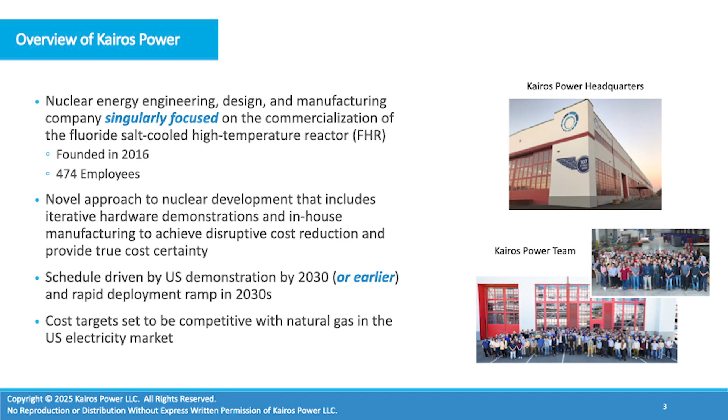Really quickly about the technology—we're not going to go too deep into all the different technologies related to our reactor technology, but we do leverage two basic fundamental parts of our safety case: the high temperature coated particle fuel, which if you're familiar with advanced reactors is fuel that's been utilized dominantly in gas reactor demonstrations, and we utilize a coolant called FLiBe. These are really the basis of our technology.

So in terms of what Kairos is actually doing, right now what we're really focused on is trying to deploy a technology that is really cost competitive.

If you start on the right-hand side of this plot, really starting with cost certainty and going from the left—utilities that are looking to make decisions today about new nuclear really are looking for cost certainty. In their planning process, they really want to know: if they deploy a new technology, can it be delivered on cost and on schedule?

We believe very strongly that to really reach that cost certainty, it's really the product of four things. Technology certainty—will it work? It has to obviously work, it has to function as designed. Licensing certainty—it's a very heavily regulated technology, so you have to convince your regulator that you've got the right approach and the right design. So there's a lot of licensing risk for new nuclear technologies.

Supply chain and manufacturing—this is a new technology, so do you have a supply chain? Do you have the capacity to really build the pieces and parts that go into your reactor technology? And last, but certainly not least, construction risk, build certainty—that's a really important piece of really deploying these technologies on cost and on schedule.

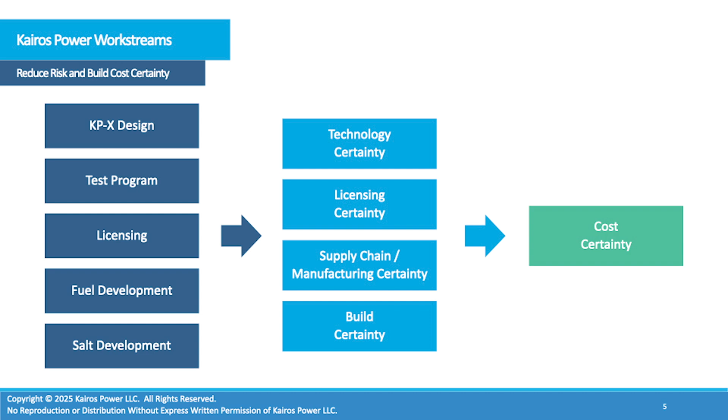So in practice, everything we're doing right now really feeds into these four buckets. All of our dominant work streams right now really drive, and all the iterations I'm going to talk about today in terms of our demonstrations, really go into these four buckets: technology certainty, licensing certainty, supply chain certainty, and build certainty. We believe if you're not working on all four of these while developing a new reactor technology, you're most likely going to have challenges on the back end.

So I mentioned iterative development. I'm going to talk a little bit about how we do this in practice.

This is a slide we actually stole a little bit from SpaceX, and we adapted it for the nuclear world. If you look at a conventional development cycle—plan, design, build, and test—and you're familiar with the big plants built in the Southeast, the AP1000 projects in Georgia, design activities on those started in the early 1990s. If you look at the time it took to actually get that reactor technology deployed, up and commissioned and operating, you're talking about a 30-year development cycle. That's a very long development cycle, from 1990 effectively all the way out to 2024.

So really trying to drive those development cycles down is a big part of what Kairos is trying to do. On the top it shows that conventional cycle, and what we've seen without really building and testing is this inner loop where you see a lot of paper designs, a lot of innovation on paper, but what you're not seeing is designs actually going to building and testing. If you have a 30-year development cycle, you're waiting 30 years to get that feedback into your design for the next iteration. This creates a lot of challenges that I don't need to spend time on here, but that's the paradigm we're trying to break right now.

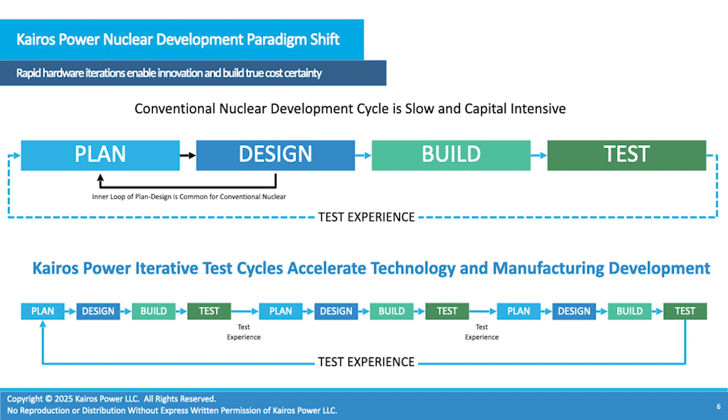We do that in a non-intuitive way, through a series of smaller iterations. I'll talk a little bit about how we do that, but the important piece is we get feedback into our design earlier than we would through these larger development cycles.

So how does that happen in practice? At Kairos we focus a lot on non-nuclear development, which allows us to move quite quickly. We have a series of what we call engineering test units—engineering test unit 1, 2, and 3. Engineering test unit 1 and 2 are located here in Albuquerque, and engineering test unit 3.0 is actually in Tennessee. We also have two demonstration reactors we're working on right now, Hermes 1 and Hermes 2. A lot of my talk today will be giving updates on these engineering test units and what we're doing in Tennessee on the reactor side.

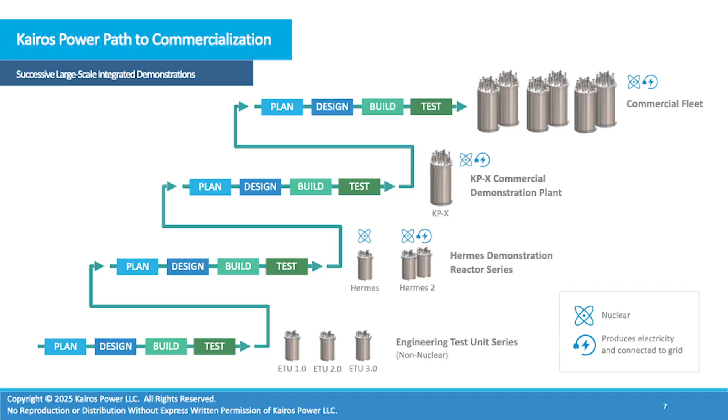Just a little bit about the company and our locations. We have a presence across the United States. We're headquartered in Alameda, California. We opened our manufacturing development campus in Albuquerque in about 2019. It was a very dynamic time—unfortunately the pandemic hit right when we announced we were going to buy the property, and that created challenges in terms of early staffing. We had plans to bring people out to California for a lot of knowledge transfer, and the inability to travel during the pandemic created a lot of issues.

We're developing a facility at Los Alamos National Lab to produce fuel for the Hermes 1 reactor, called the low-enriched fuel fabrication facility. We have an analogous facility here where we're doing fuel development, but not at the scale we'd want in Los Alamos. We have a site in Oak Ridge, Tennessee, where we're building the Hermes 1 and Hermes 2 plant, and we've already started construction on Hermes 1. We have a small licensing office in Charlotte, an instrumentation lab in upstate New York, and a facility at a partner called Materion, where we produce our coolant FLIBE at scale. That's an important location for us.

So I mentioned vertical integration. Really, the vertical integration we've been focusing on includes some of our major work streams—fuel and salt are really important to Kairos. That's very important to our safety case and to making our reactor work. So we've made commitments to bring in salt production as well as fuel production. These are just examples—I mentioned the site we have in Elmore, Ohio, where we're able to produce metric ton quantities of FLIBE that we need for our reactor demonstrations.

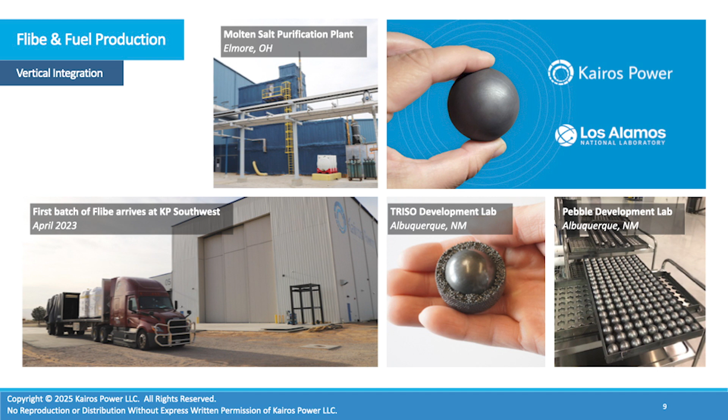In addition, we have a lot of work around fuel, in partnership with Los Alamos. We have a pebble development lab where we produce pebbles, and we're standing up a TRISO development lab where we have a state license and work with natural uranium and depleted uranium. This enables us to iterate very quickly and bring design concepts into the fuel form itself.

In terms of manufacturing, a lot of what Kairos does, about a quarter of the company is actually in manufacturing, so we have a very big manufacturing presence. We hold an ASME stamp for Section 8, so we're able to do vessel production. We set up a lot of this capability with a lot of local hires. It's been a great process in terms of standing up the manufacturing.

In terms of manufacturing capabilities, we've stood up a lot of both milling and machining capabilities, milling and turning capabilities at our site, shown in the upper right picture. We have a pretty substantial welding team. We brought in vessel manufacturing, an area we've been focusing a lot of attention on. We will be producing our own reactor vessels as well as vessels that support the overall technology.

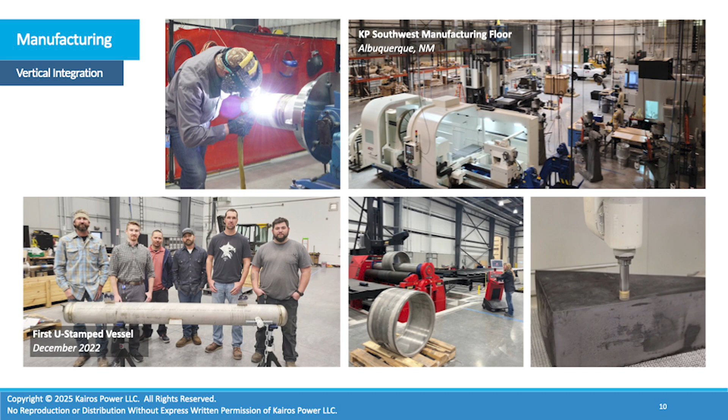And in the lower right, we have graphite in our reactor as a moderator. It's a very important part of the design. The graphite machining is a capability we've also invested in and are standing up. So there's a lot of manufacturing activities happening down in Mesa del Sol. It's effectively where we do our large-scale manufacturing, and where we do a lot of our large-scale testing.

To talk a little bit about a commercial agreement that was announced: we have an agreement with Google that was signed recently, you may have seen the news around that. There's been a big push from the hyperscalers and a lot of interest in AI power demand challenges, so we have a partnership we're very excited about with Google. We've signed a master plant development agreement that creates the right framework for us to set up power purchase agreements with utilities and regions that Google is trying to service. That's a process we're going through now.

And we do plan to have some news that will be coming out in the public domain relatively soon. But this is an agreement that allows us to work through the commercial case on the back end, which is really important to us.

Here's some additional information around the vertical integration part. These are some of the pieces and parts that we are focused on. On the left-hand side, you can see some of the nice manufacturing activities. I'll talk a little bit later about the vessel manufacturing. This is rolling plate here, pieces and parts that go into key parts of our reactor system. So just a lot of manufacturing and a lot of focus on effectively building and demonstrating the technology.

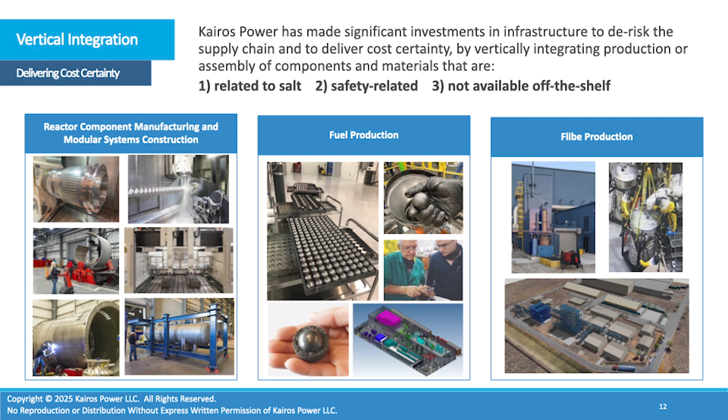These are pictures of the fuel production line and some of the pebbles that went into our first engineering test unit. And then the salt production facility - this is a facility we just broke ground on in Mesa del Sol. You can see it here a little bit, but we just started construction on it. This is the place where we're going to produce the enriched FLIBE that we need for our reactor in Tennessee. This is a big project we have ongoing, and it's really setting up the capabilities for us to produce FLIBE at scale.

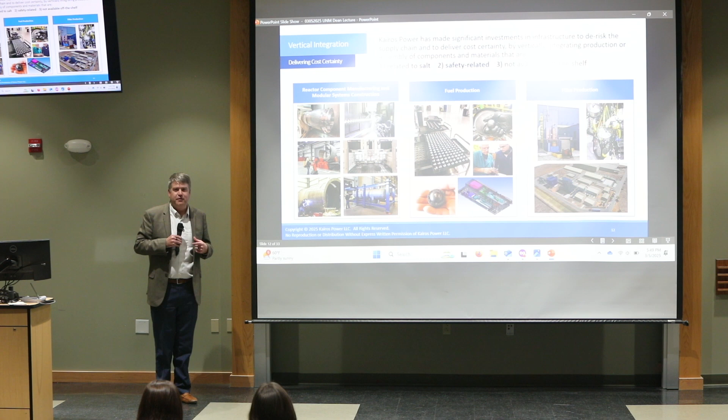An important thing to take away is that even though the Hermes 1 reactor is in Tennessee, many of the pieces and parts that make up the primary system actually come from here in Albuquerque and are fabricated here. So a lot of the manufacturing activities are actually supporting that deployment in Tennessee.

So I'm going to talk a little bit about these major iterations - what is Kairos actually doing? We're trying to demonstrate our technology through these iterations. The first one we built, this facility was run. We've actually decommissioned it and it's been moved out of the current location, so it's no longer with us, but I'm going to talk a little bit about it because we got a lot of lessons learned from it. Why did we do this demonstration? I mentioned we do non-nuclear testing.

This is not a facility that's regulated by the NRC. It's a facility regulated by OSHA and EPA and obviously local permitting authorities, but it's not regulated by the NRC. It doesn't have nuclear material in it. It's effectively mock-up material, but it performs mechanically very similar to the reactor system.

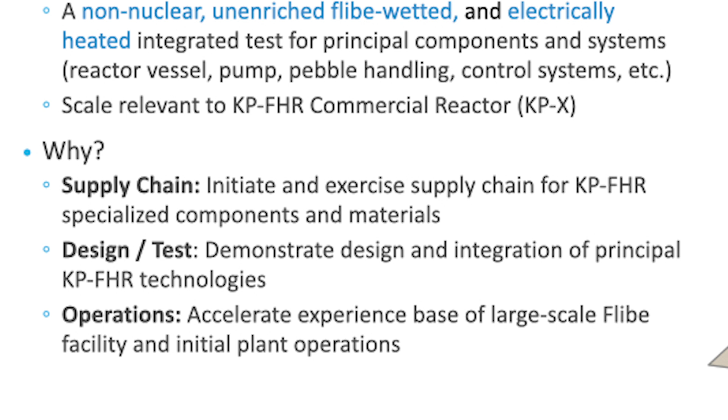The three areas that we were focusing on was really to evaluate our supply chain. If we didn't have a supply chain that can make a mock-up of what we were trying to do, then we knew they couldn't deliver for the reactor system. So evaluating the supply chain was really important to us. It also enabled us to build an organization that was able to do the design, test, iterations in-house in a very efficient way. So that was also a very important objective for the ETU-1.

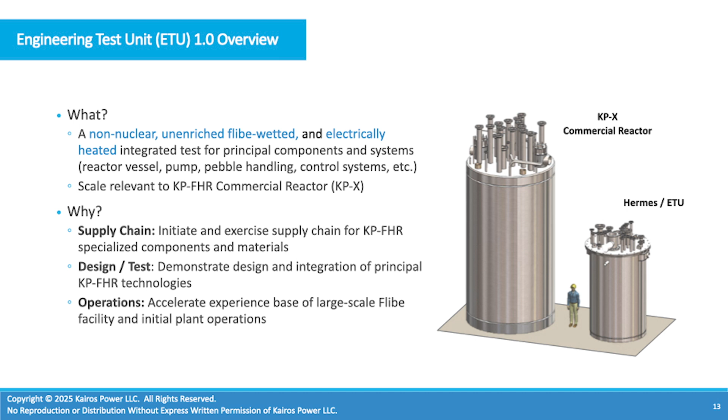And last but not least, once you actually build the facility, running a 24/7 facility like this and getting the operations back into the design, again, very, very critical for Kairos. So if you remember my earlier slide where we talked about technology certainty, licensing certainty, supply chain certainty, and construction certainty, these are examples of how this kind of feeds into our development.

So the engineering test unit 1, got some pictures here. I'm going to walk through some pictures of the actual build. As I mentioned, we took the property over right at the beginning of the pandemic, so a lot of this work was happening during that time period. This is all in Mesa del Sol. This is when we acquired the shop manufacturing building down in Mesa del Sol.

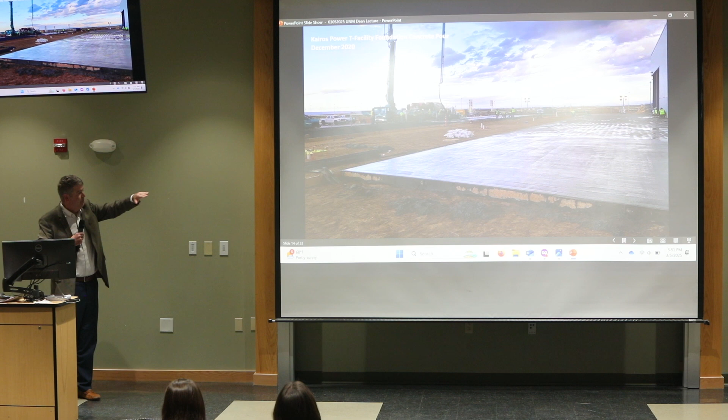The first thing we did was we actually added an annex. It's a beautiful building, but it's actually got a very low high bay in terms of the roof height, so it creates some challenges for doing larger scale tests like what we're building. So I'm going to walk through some pictures that show the engineering test unit 1 in Albuquerque and just kind of show the sequencing of the build.

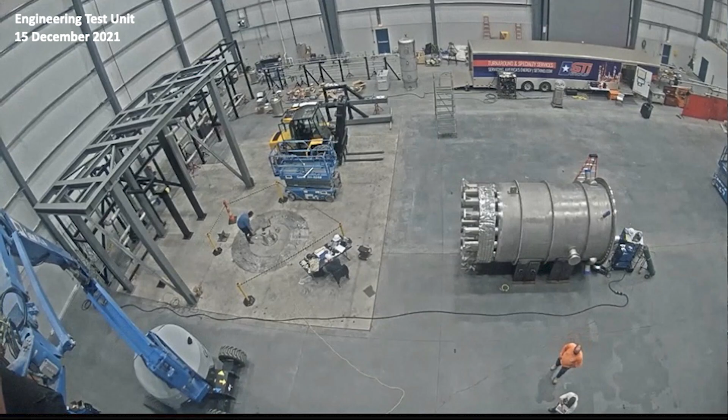So this is what we call our ETU annex. It's now where we do vessel manufacturing. It's a 40,000 square foot pre-engineered metal building. It's what housed our engineering test unit 1.

This is a picture of the vessel that arrived. I mentioned we brought in vessel manufacturing. This vessel was not produced in-house, it was actually an external vessel. When it arrived, we had some tolerance issues with it, and so we actually had to do a fair amount of machining of the graphite that had to go into the vessel. It was actually a result of this experience that we made the decision to bring vessel manufacturing in-house.

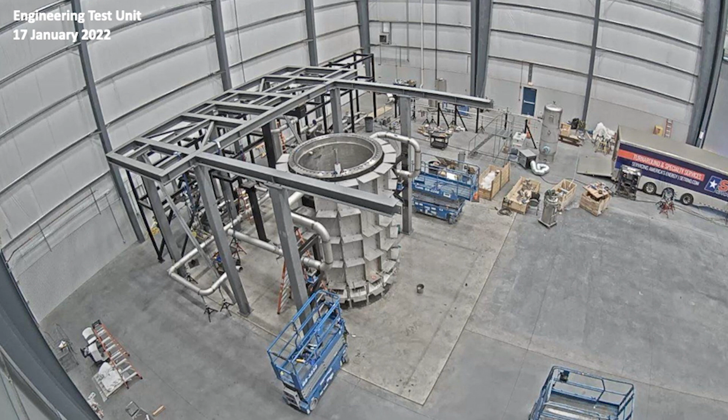So this is a picture of the vessel about to be lowered and placed into its location in the enclosure. This is showing the heaters coming up around it and the interconnecting piping, the large bore piping where the FLIBE flows through, and a lot of the support infrastructure around the vessel.

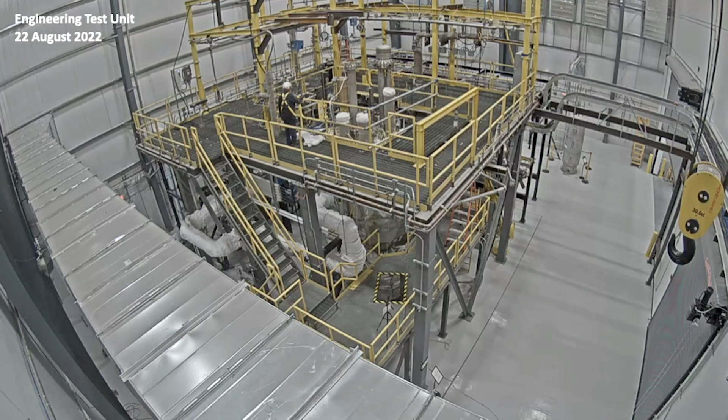Moving forward to August of 2022, you can see more of the upper head equipment has been installed. In the upper region, you've got insulation going up around all of the piping and the vessel, and you can see more of the facility coming together. And this is the final picture of it prior to operations, actually post-operations.

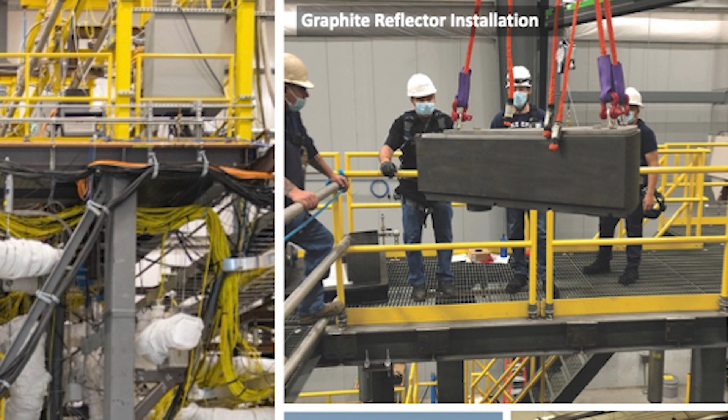We self-perform a fair amount of the work that we do. Certainly for assembly of the engineering test unit, in the upper right hand you can see some of our team members actually installing the graphite blocks in the reflector structure within the actual vessel itself. In the lower right, you can see FLIBE actually arriving. Again, it's about 12 metric tons that we loaded into the engineering test unit 1, which is a pretty substantial amount of material. We have 2 control rooms.

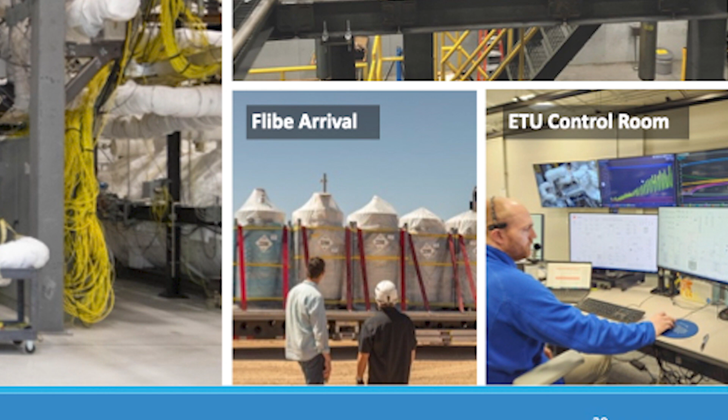We have one in Albuquerque and we have one in California, so we're able to do remote monitoring from California as well. This was a big change for Kairos. We're not a 24/7 operations company, but when we started up ETU, it became very clear we would have to run this facility 24/7, and we had to do it over several holidays. This was a big shift for the company, but it actually created a lot of opportunities to build up the operational program that we're going to need for our reactors.

So what are some of the lessons learned?

I mentioned really from the ETU1, we had some tolerance issues with the vessel as it arrived, so that was a major lesson. If you look at reactor installations, the vessel is a very central part of the construction process, so not having your vessel early is a challenge. It's also one of the last components you want to design, so there's a lot of tension between trying to get the design complete and having the vessel arrive.

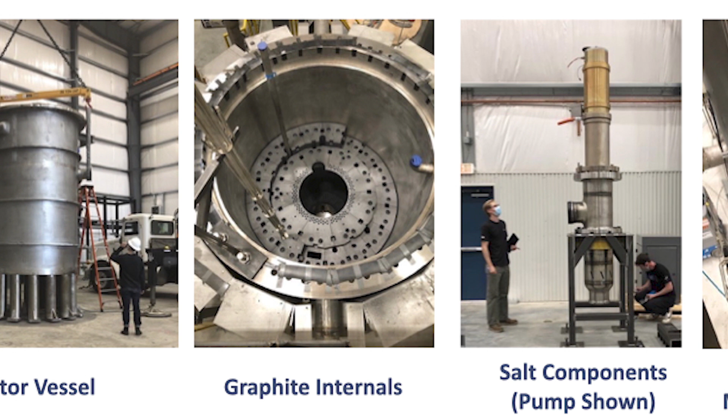Because of the out-of-tolerancing issues that we had with the vessel, we actually had to remachine all of the graphite blocks. There's about 308 graphite blocks that make up the reactor internals here. We had to go back and remachine all of those, which was a big deal for us, but because we had that capability in-house, we were able to do that relatively efficiently.

A lot of positive experience about the pump. This pump was actually a pump that we worked with a company called Barber-Nichols to develop. We brought a lot of that technology and capability in-house, so the pump that we're building for the ETU2 is all built within Kairos proper.

And then last but not least, we learned a lot about the value of modular build. We were not able to do that for the engineering test unit 1. We were forced to do some modular builds just due to the schedule and how it played out, but it really pushed us in a direction for engineering test unit 2 to really incorporate modular construction into the process.

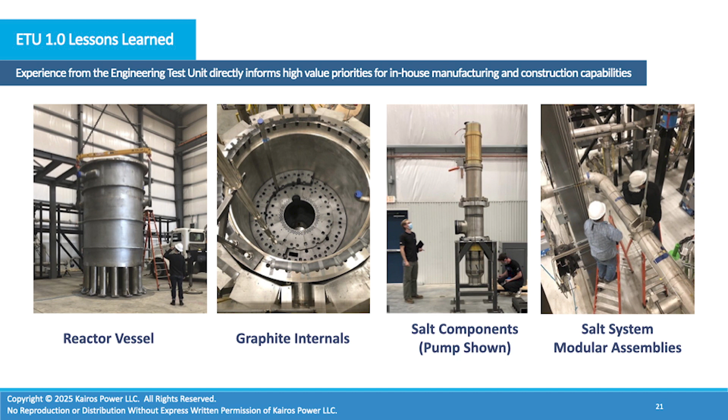One of the major lessons I would say is getting a complete design and getting a facility like this through the finish line actually takes a lot of work. There were many times that we were at 90%, and we were at 90% for a long time. The reality is getting the design complete has a lot of major challenges.

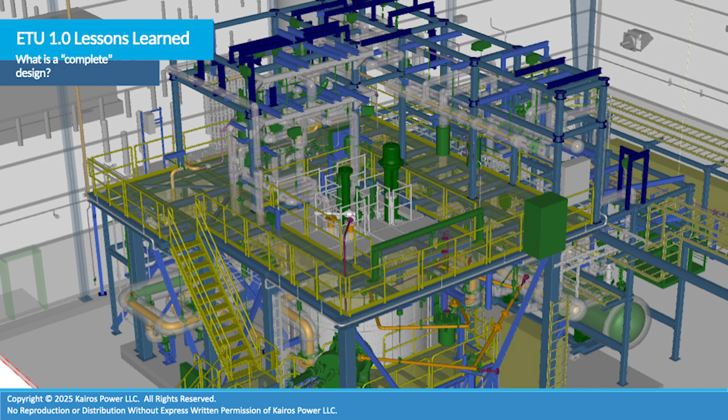When you look at nuclear construction today, one of the things they will always say is you need to have the design complete prior to starting construction. In practice, getting to a complete design has a lot of challenges. This was a very important process for Kairos to get to that final finish line on the design, but that was a very valuable lesson for us in terms of not being too optimistic about schedule and ensuring that you have the ability to deliver.

This is just a little bit of information about ETU1 in terms of the numbers. It's a high temperature system, so it operates normally around 600 degrees Celsius. These are just some of the capabilities that were demonstrated. We like to say it's the world's largest FLIBE system ever built.

The other large FLIBE system we can look to is really the molten salt reactor experiment that was built in Oak Ridge, which had about 4.5 metric tons. So this is at a pretty substantial scale in terms of the new application and the new environment, in terms of the actual tonnage of the salt.

We have a system where we insert pebble fuel, so it's online refueling. The ability to demonstrate that capability was really important for us, so we were able to go through that process of loading fuel in and removing fuel. We were also able to push the pump to very high flow rates, so get confidence in how the pump behaves.

We do have a mock reactivity control system. It's actually all the same equipment that you would use in an actual reactor, but of course we're not controlling reactivity. We're able to see the mechanical insertion, how it performs and how it behaves. We had about 25,000 strokes of that system.

And then also chemistry control for us is really, really important. The ability to actually demonstrate chemistry control and show the ability to take samples and to monitor, those are all really important steps for us. And it's very difficult to do that for a first-of-a-kind reactor system. If you can do that in a non-nuclear environment, you can demonstrate a lot of those capabilities.

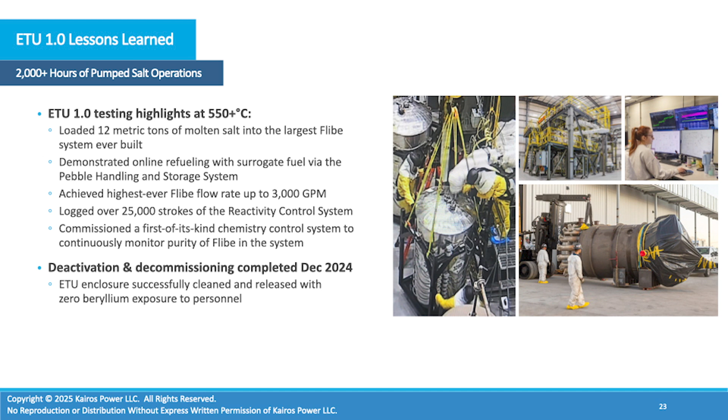Last but not least, we had to go through the full life cycle of actually decommissioning the facility and removing it and cleaning it in a very responsible way. You can see on the lower right, that's actually a picture of the vessel leaving the facility. That's really important to us. We're going to be building a reactor that we're responsible for the D&D of that facility.

Getting lessons into how to look into decommissioning these facilities, even though this isn't a rad environment, it's a beryllium-bearing salt, it's still a very highly toxic environment. And getting those lessons have been very important for us in terms of driving costs down for the Hermes 1 reactor design.

So I'm going to talk a little bit about a new test that we're building right now, which is called the Engineering Test Unit 2. This is an activity that we're doing right now, again in Mesa del Sol.

Why are we doing it? Well, there are about 4 reasons listed here. We have very strict cost targets that we're developing this Engineering Test Unit 2 under, related to the 80% of the cost coming from commercial off-the-shelf items and raw materials. So that really forces our team to leverage our manufacturing capacity, and that's been very critical for us, better leveraging our manufacturing capability.

Demonstrate some more features of the actual Hermes 1 reactor system, so how we can actually start up the reactor. That was very critical for us. In particular, we were looking at capabilities around upper head maintenance and things of that nature.

One of the big features for the ETU2 that we've been adopting is really this modular design concept. A lot of the Engineering Test Unit 2 is actually being built in a facility next to the enclosure that I showed you earlier, and that equipment's going to be brought in as it's being readied.

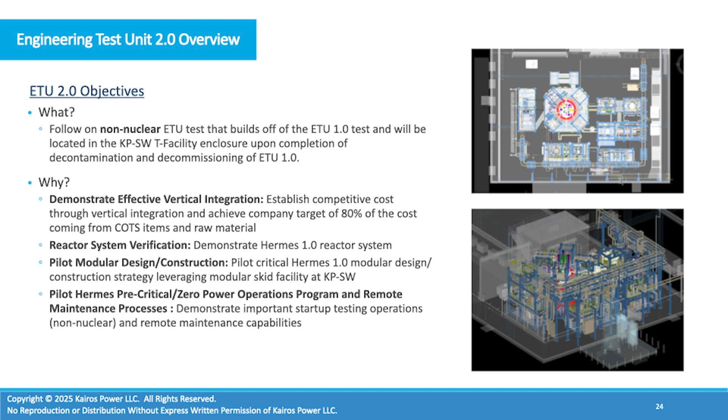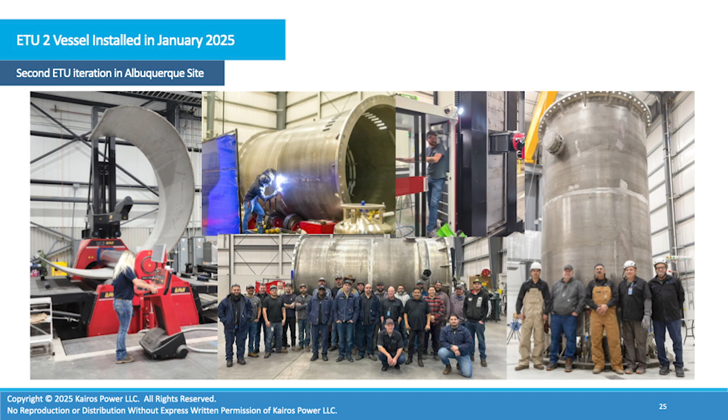So where are we with the Engineering Test Unit 2? Very pleased. We got our vessel installed earlier this year in January. This is a picture of the team. This was a vessel that we did entirely in-house. We have a milestone for our DOE program that we had to install this vessel. We hit the milestone of January, so that was really important to us. This is just a picture of the team very proudly showing the vessel prior to insertion.

Plate comes in, it effectively gets rolled. There's a whole process around machining and welding the vessel together. And then the installation is shown here on the right-hand side with a very proud team that finally got the vessel installed. So we're building out this facility as we speak.

This is an approach that we're going to utilize for Hermes as well. We'll be able to send similar equipment to Tennessee, from New Mexico, to be installed into those reactors in Tennessee. So really the lessons from ETU2 are going to inform the construction of ETU3 and what we're doing in Oak Ridge, Tennessee.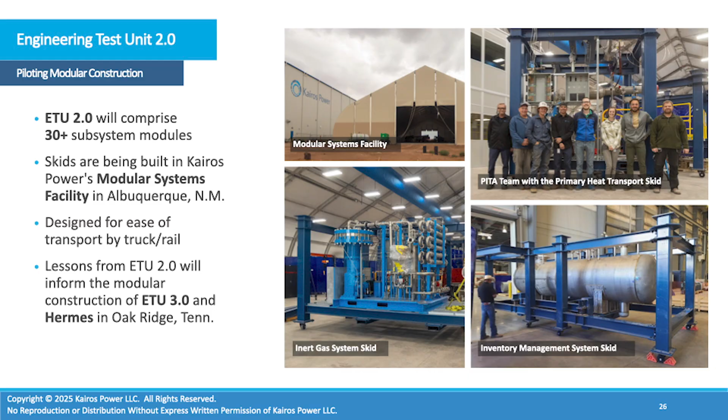So this is just a quick picture of what we're doing here in Tennessee. There's not much to show, at least right now, because we're still in early construction. The Engineering Test Unit 3 is effectively a construction mock-up area for us. It's an area where we can actually learn a lot about the construction needed for nuclear construction. We can bring those lessons from commercial construction and bring them forward in the nuclear environment.

I'll give you an example of that. We have 73 drill piers that make up the foundation of our ETU3 building. A little schematic of it shown over here. It's actually bigger than our Hermes 1 reactor building, so it's a pretty substantial structure.

The drill piers and the contractors that we're using for this work are the same technology and the same contractors that we're going to be using for Hermes, and the nuclear safety related construction. So this has given us effectively 73 drilled piers, 73 lessons in terms of how, when we go into the nuclear construction for Hermes, we can bring those lessons learned into that environment. That's really important for us. Having effective quality control is absolutely essential for nuclear construction, and getting those lessons from commercial construction, then bringing them into the nuclear environment early has been a really big win for us.

We're going to be building effectively a lot of the upper head components that go into the reactor in this building over here, which is where the ETU-3 is going to be located. We plan to install that vessel in May, so that's what the team is working closely on. We're now fabricating that vessel, but we'll have some announcements about what we're doing in Engineering Test Unit 3 pretty shortly. This is a capability we've gotten started on in Tennessee, and it's really the precursor to the Hermes 1 construction.

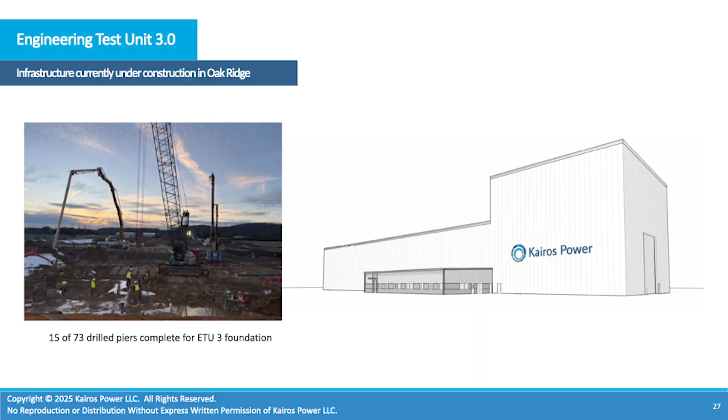So I'm going to talk a little bit about the Hermes reactor itself. This is a nice artistic rendering of it. As I mentioned, we're starting with the commercial construction for our ETU-3 on the drilled piers, but we've done excavation for the Hermes 1 site. So we've completed excavation, and that's been a pretty substantial challenge.

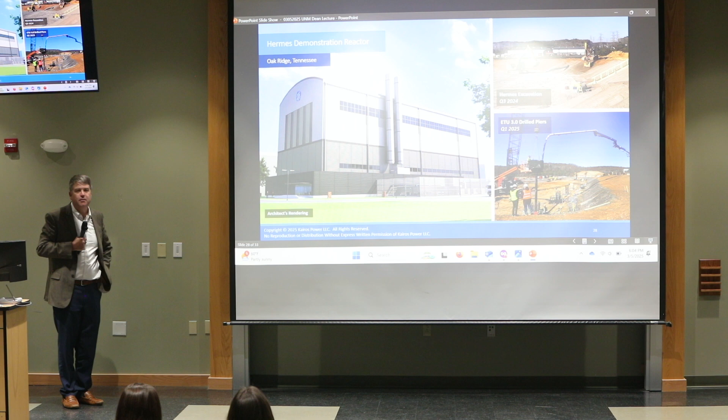The site we have in Tennessee is a beautiful site, but it's also the site where the K-31 and K-33 enrichment facilities were originally located. DOE spent a lot of money cleaning up the site and preparing it for companies like Kairos and others to leverage it appropriately. One challenge is that a fair amount of that K-33 enrichment facility had footers and duct banks located underground, and when DOE removed the original building, the subsurface components were still in place. So when we did the excavation, we had a lot of work managing and removing that material responsibly.

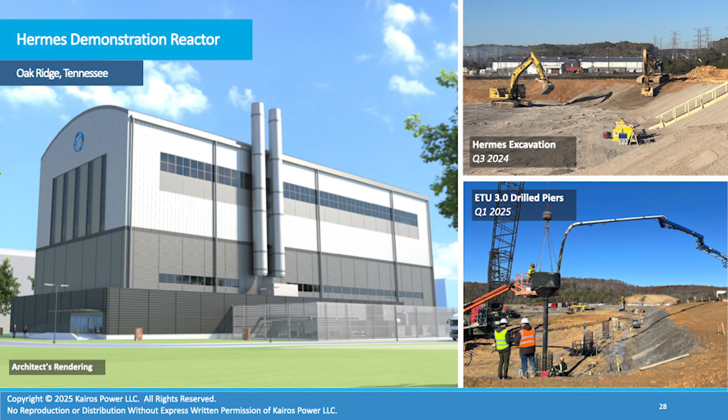But we got through that, and we'll be starting drill pier construction here for Hermes 1 in about 6 weeks.

Licensing is a very important part of what we do, and licensing certainty is absolutely critical. This is just a quick schematic showing how Kairos has approached licensing. We've had a lot of early engagement with the NRC through what we call pre-application and issuing topical reports. You can think of these as, if you're writing a dissertation with 5 chapters, getting your professor to look at each chapter before you submit the whole thing. It's a similar concept, where they're able to look at those topical report sections and issue what are called safety evaluation reports.

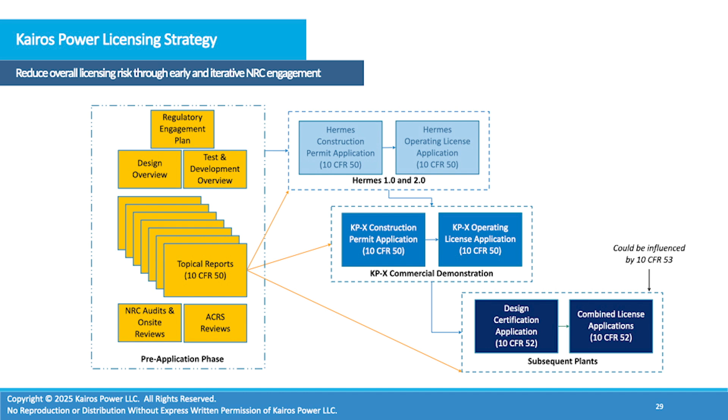That allows us, when we submit our construction permit, to have a lot of that licensing risk de-risked and get those insights into the licensing package. So that's been a big part of what we've been doing. This just shows some of that engagement, and it's been going very well to date.

In terms of what we've accomplished on the licensing side, we have construction permits for both the Hermes 1 reactor and the Hermes 2 reactor, which will enable us to start construction. What Kairos is doing is a bit of a change from the old historic approach, which was always what we call a 2-step process. There was an effort to make it more streamlined, what we call a Part 52 process. That had a lot of challenges in its implementation, with that big project I mentioned in the Southeast in Georgia. So Kairos has adopted that 2-step process.

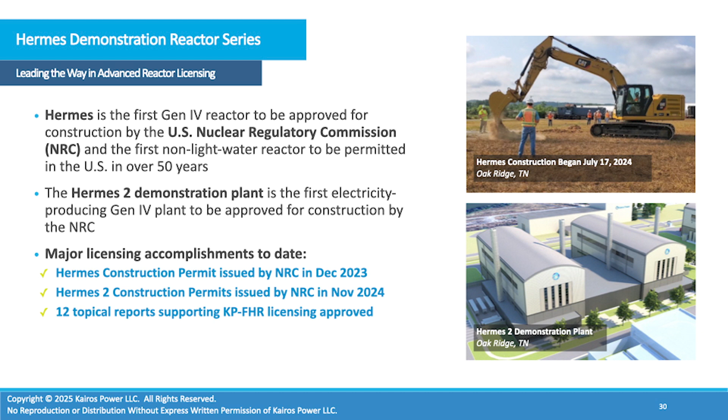A lot of the developers today are going back to that 2-step process. What that basically means is you submit a construction permit, which allows you to start construction, and then you submit an operating license application to run the facility. So there are 2 steps in that process, but it does allow you to start construction, especially early on. This shows some of the highlights here. We've issued 12 topical reports, and we've got those 2 permits. This is a really big part of getting the licensing certainty I was mentioning earlier.

So I'm going to conclude here. I think 35 minutes was roughly where we were going for. Just some key lessons learned and observations. Leaving an academic environment at a great place like UNM and going into a more commercial environment, learning to do things a little differently, there's been a lot of lessons taken away. These are some of the key lessons I've been thinking about and writing down. The right strategy is essential, but the biggest challenges are in the execution. That nice chart I showed you earlier is pretty easy to put together, but in practice, delivering these installations takes a lot of work, and the execution is really critical, very important for Kairos.

I would say the hard things are often easier than people think, and the easy things are often much harder than people think. When we vertically integrated, we heard a lot of people say don't do that. The reality is it is difficult, but a lot of the things that people said were hard were not impossible, and they may not have been as hard as they seemed. On the flip side, things we thought would be easy, hiring, bringing certain folks in, finding the right talent, actually proved to be quite complicated. So I think a level of humility is important.

I think this is probably pretty common for a lot of ventures and new startups. The balance between speed, creativity, and structure process is a constant struggle. It's a challenge, and one of the things Kairos has focused very much on is having an organization that's quite agile. That can be very difficult when you start to get a company of the size of 450, so that can create a lot of challenges.

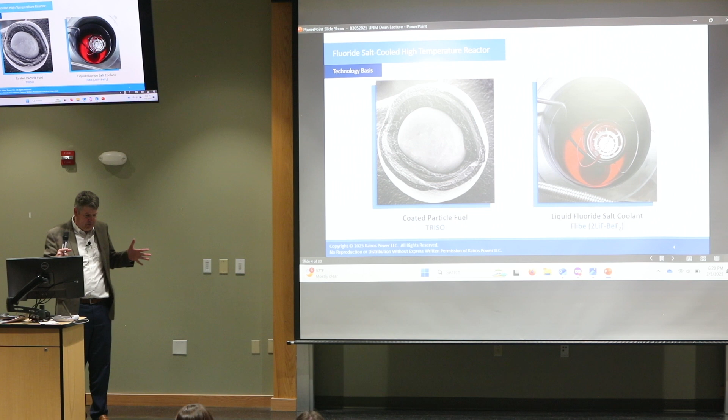When we get our TDL facility up and running, we'll be able to inform that more, but that is an important part. As the schedule gets compressed, we do have to find ways to deliver the fuel faster—that's where these capabilities are really important for us.

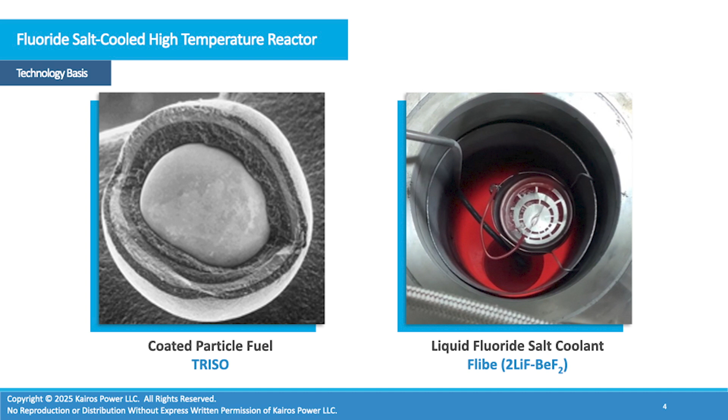So for the engineering test unit 1, we had about 35,000 of these pebbles, all hand pressed by our technicians. And we actually developed automatic pressing capabilities to accelerate that process. That's really important to us because we have a pretty small facility at Los Alamos that we'll be putting our equipment into, so to get more production and capability out of it is really important for us.

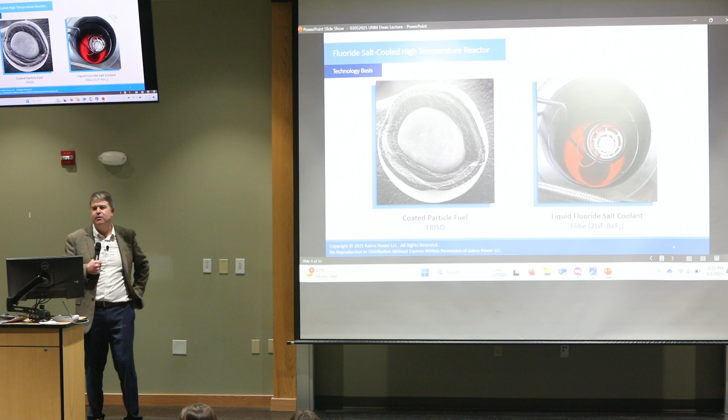Maybe just coming back again to the start of the company, to which extent did IP come out of the university system into the small startup?

Kairos' position on IP is a little bit unique in the sense that we believe our technology is relatively novel enough, and we're moving fast enough, that spending a lot of time filing hard IP and patents has not been a focus for us. So we don't have a very large IP portfolio. It takes a lot of effort to file those patents, and then your engineers are filing patents instead of doing development and moving things forward. So we've not had a strong focus on IP.

There has been some IP developed at the university, and some of it has been leveraged for the work we've done here at UNM. That IP is less applicable because it was for a different design at the time. There's really not a lot of incoming IP that we've been overly concerned about, but it is part of our strategy around protection. We do have trade secret activities around the fuel and the salt, which are important to us, but those are not in the visible sphere.

Can you comment on the environmental impact of this technology compared to other technologies, and how you can sell it to the general public?